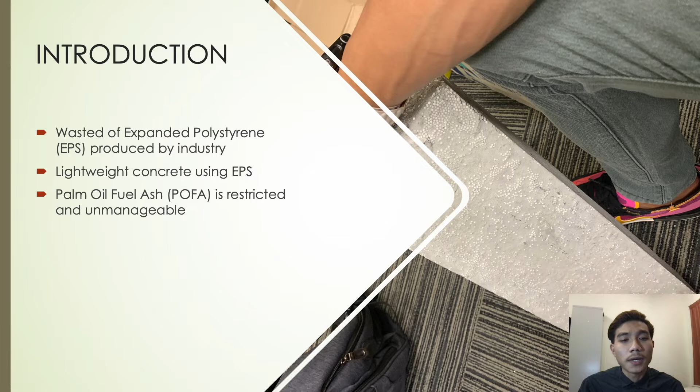POFA is restricted and unmanageable, yet its quantity rises every year and the vast majority of it is discarded, producing environmental and other problems. Numerous studies have demonstrated that POFA-containing concrete has greater compressive strength, durability, and other qualities than OPC-only concrete. Other studies have demonstrated further benefits of POFA substitution in concrete in particular quantities, including the reduction of CO2 gas emissions and consequent improvement of environmental conditions.

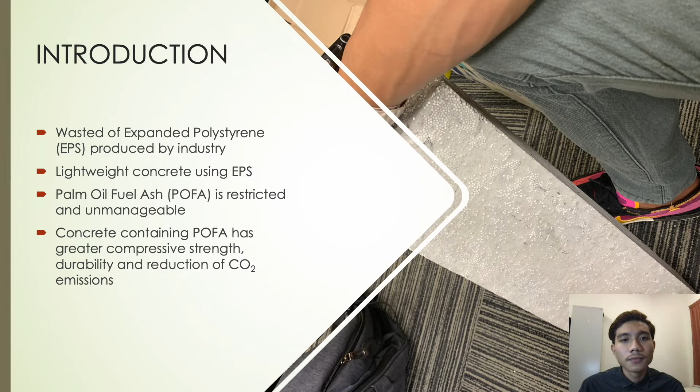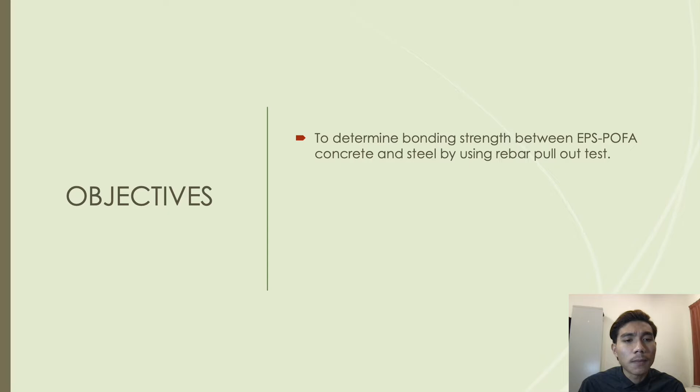For the objectives of this final year project, the first one is to determine bonding strength between EPS, POFA concrete and steel by using the rebar pull-out test. The second one is to find the ideal replacement material percentage of POFA and EPS. And the last one is to investigate the mechanical properties of concrete containing POFA and EPS.

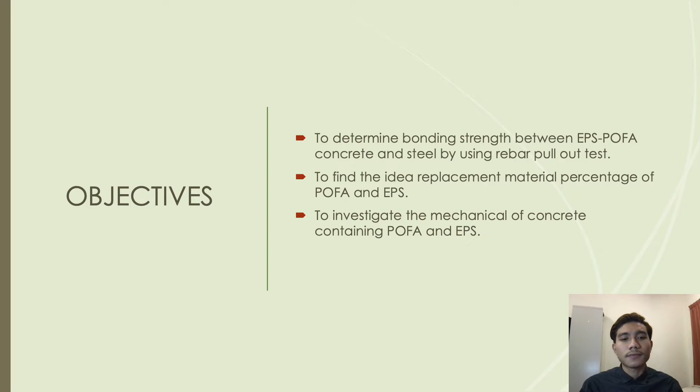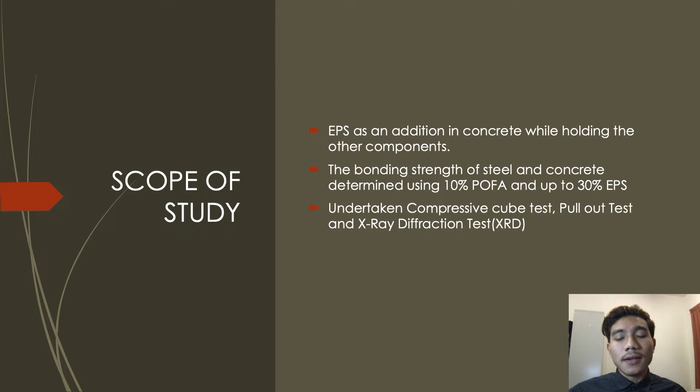Scope of study. Due to the fact that the physical and mechanical characteristics of expanded polystyrene, EPS, are distinct from those of traditional fine aggregates, the study focuses on the use of EPS as an addition in concrete while holding the other components, which are sand and granite, constant. Numerous research has been undertaken to determine the value of palm oil waste applications in the production of concrete, and it has been determined that these wastes have value.

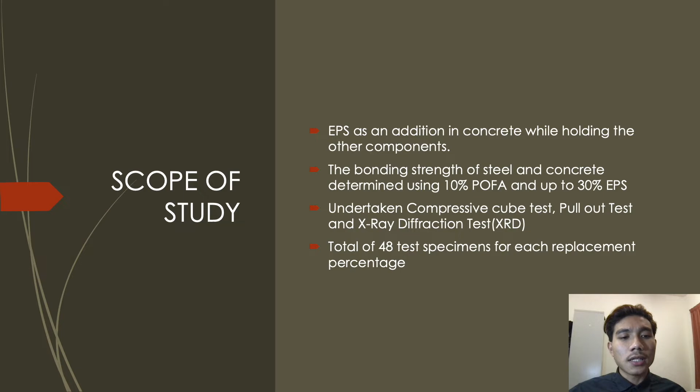So the bonding strength of steel and concrete will be determined using 10% of palm oil fuel ash, POFA, and expanded polystyrene. Several tests, including the compression cube test, the pull-out test, and the X-ray diffraction test (XRD), were undertaken. A total of 48 test specimens for each replacement percentage has been used.

For the literature review, first is concrete, that consists of Portland cement, water, and aggregates. And we have 9 grades of concrete for specific purposes. For this project, we use grade 25. And for POFA, palm oil fuel ash, POFA is an industrial byproduct of the palm oil industry. It is produced by the combustion of palm oil plant byproducts. POFA has been utilized not only in conventional concrete but also in specialty concrete such as high strength, high performance, and aerated concrete.

The EPS was composed of 98% air and 2% polystyrene substance. It is impervious to water absorption and has excellent impact resistance. As a result of its durability and thermal insulation capabilities, EPS is commonly employed in the packaging industries.

The pull-out test, which involves pulling a reinforcing bar from a concrete block, is the most common method for measuring the bond strength between reinforcing bar and concrete. Effective adhesion between reinforcing bar and concrete is required for the full development of composite action in reinforced concrete. Consequently, the connection of reinforcing bar is essential to the structural behavior of reinforced concrete.

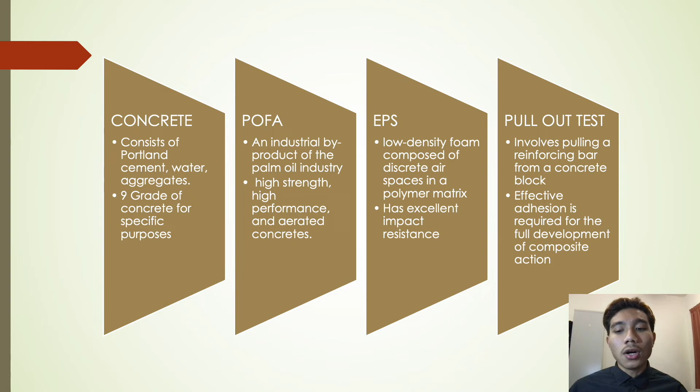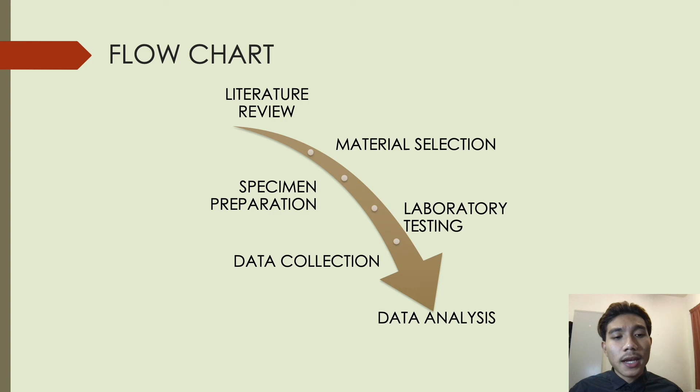And the next one is laboratory testing. There are 3 tests that we run. The first one is the compression cube test. The second one is the pull-out test, and the third one is XRD, which is the X-ray diffraction test for POFA identification. The next one is data collection, and the last one is data analysis.

The conclusions: the application of EPS to produce lightweight concrete can simultaneously mitigate the consumption of natural aggregates and polystyrene waste generation. Rich in SiO2, POFA acts as a good pozzolanic material to replace cement in concrete mixes. In terms of compressive strength, the concrete samples made from cement and POFA with original size have less compressive strength than conventional concrete samples, but the concrete samples made from cement and POFA with fine particles have compressive strength higher than traditional concrete samples.

From an environmental perspective, agricultural waste materials have been investigated by many researchers and have been shown to have better properties in concrete than cement materials, whereas the latter also generates a high amount of CO2, which is harmful for the environment.